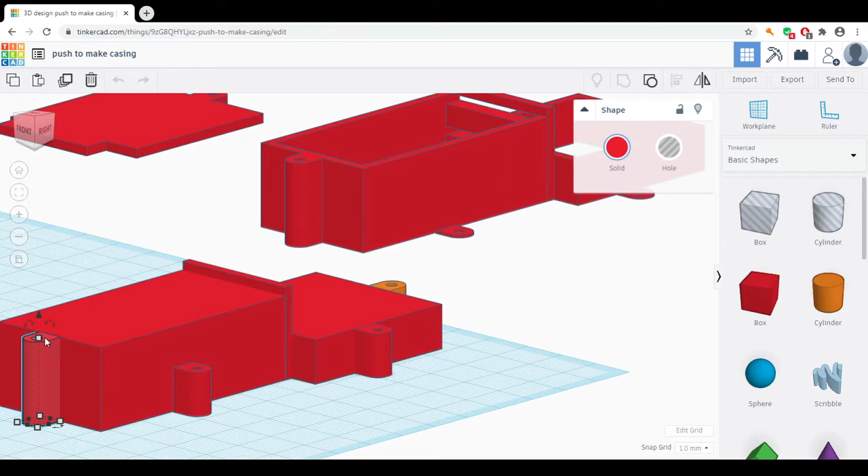So I'm going to make this 10, going to make the height of this 10. Okay, so it's all leveled out, looking good.

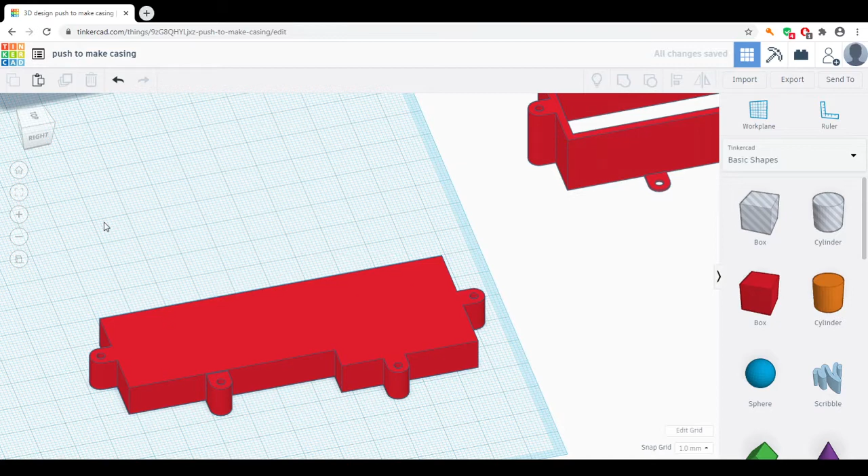Let's group everything again. And group it. Great, let's just check everything's been grouped. Oh, what's this? That doesn't look like it's 10, so let's ungroup again.

Click on that, what's that? No, it's 10. Does that look a little odd? Ah, that's not joined. Oh dear.

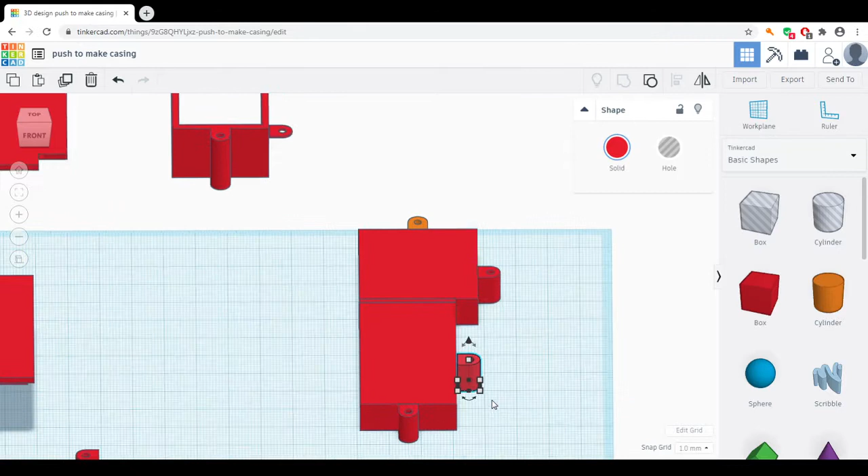Okay, so I'm just going to bring that in a tiny bit. Let's just look at it from top view and bring that in. Okay, great.

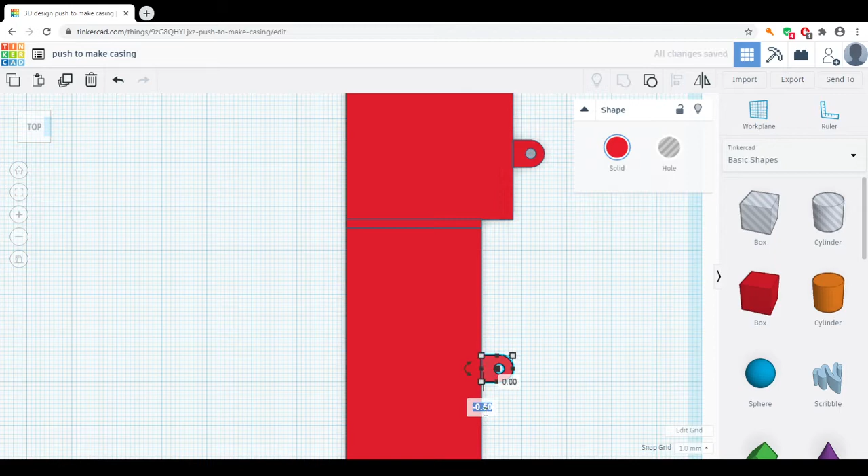Let's make that 0. That's great. It should be okay, it's not joined. Oh, that means I've just moved it in 0.5 millimeter.

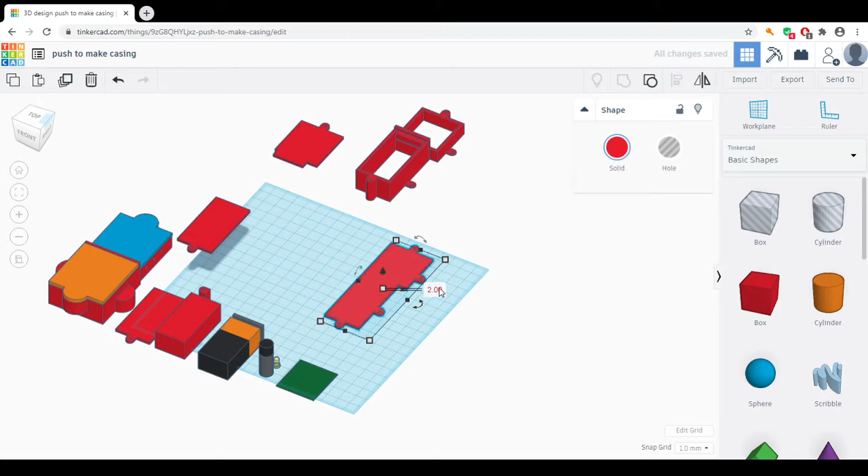Okay, group. Now that looks proper. Okay, I'm going to make this 2. Okay, and that now makes these screw holes at 2.5, because these are just at half a millimeter.

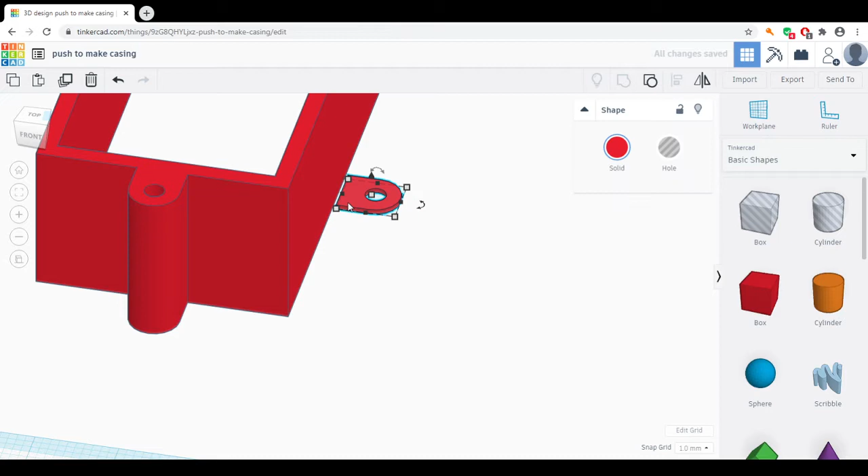I just need to ungroup this. This come across. I need to ungroup it again. That now looks as though it is ready. So let's just drag that in.

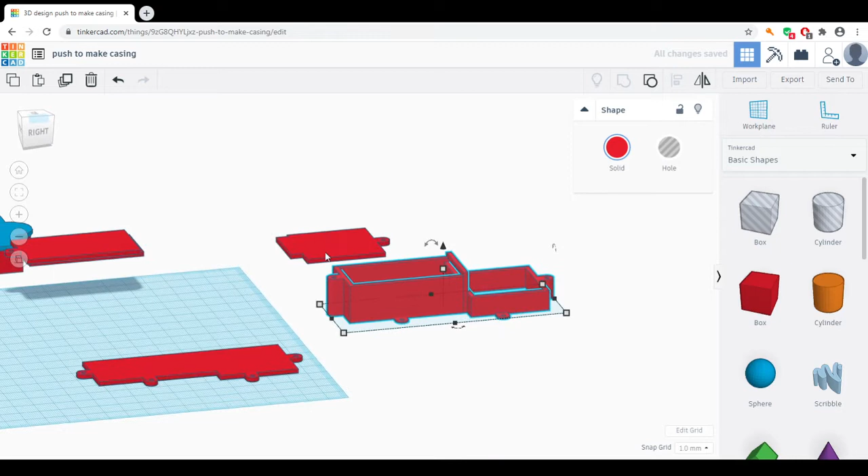Great, done. Now you've got to be very careful that you don't mess with the symmetry. I'm quite confident that that was okay. So that's ready, lids are ready. Base is ready. If you want to, you can place this on top and raise it up by 2.

But I'm not going to do that. I'm going to put the holes into this. Now I'm just going to do this very simply by placing 3 holes on this side and 1 hole on that side, because on the PCB that's what it looked like. I hope I've got the orientation of the PCB the right way around.

Each of these holes I want to make them 3 millimeters big.

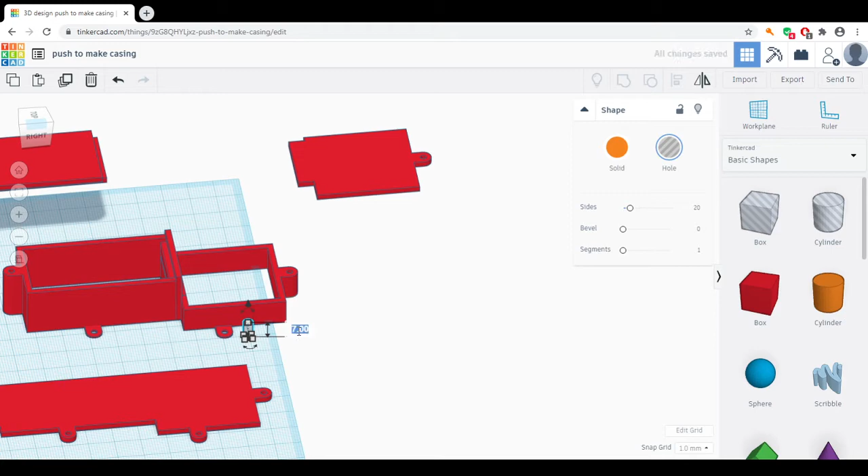Okay, brilliant. And I'm just going to make this... we can make this 2, or we can make this. Let's make it 2. And let's zoom right in.

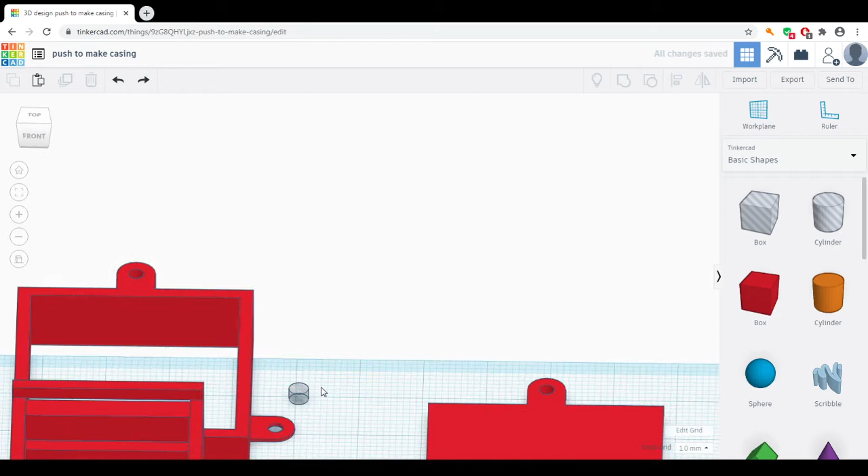All right, and let's rotate it. It's not rotating the right way. Excuse me. Sometimes it's better to make it taller, so... there we go, that's 90.

Oh, I won't do that. Make it taller because then basically it's easy to see what you're doing with the rotation of it.

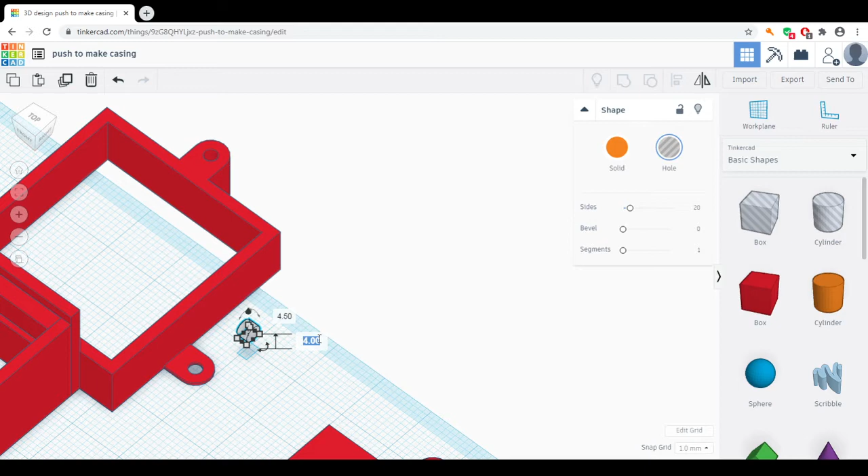Okay, great. So let's raise this up. From the base it's 3, and the sides I think were 10, so let's raise it up from the floor. I mean 4 is probably fine, and let's get that in place.

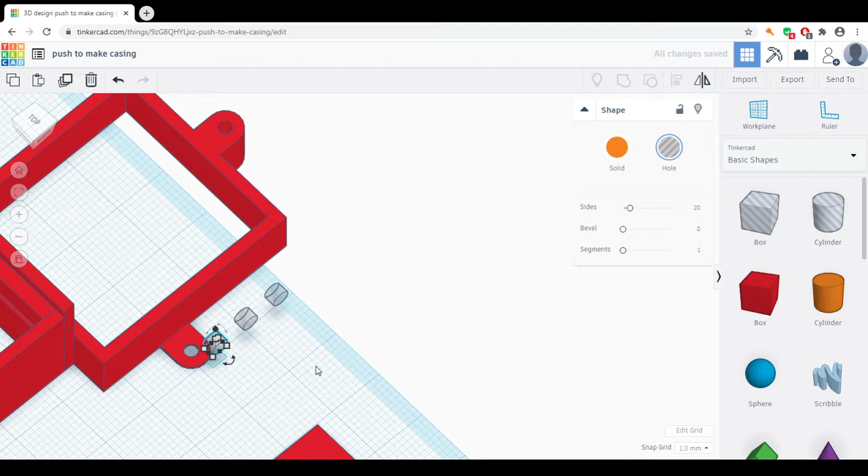So actually before that I want to copy that and bring it over 1, 2, 3, 4, 5, and do the same this way. Copy that, paste. 1, 2, 3, 4, 5. That looks pretty equal. I'm not going to be too picky.

I'm going to group these 3. Oh, before I do that I need 1 more, the other side. Push that back all the way. Okay, great, good.

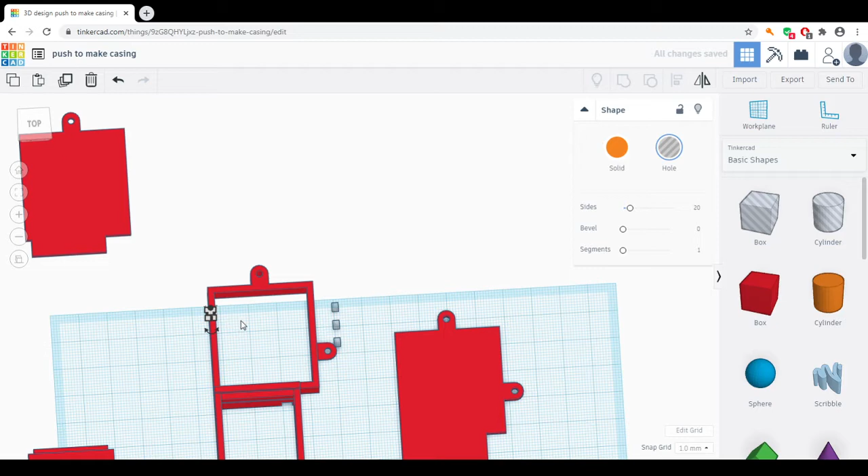I'm not going to be too much of a perfectionist with the placing of it. Just going to push it through.

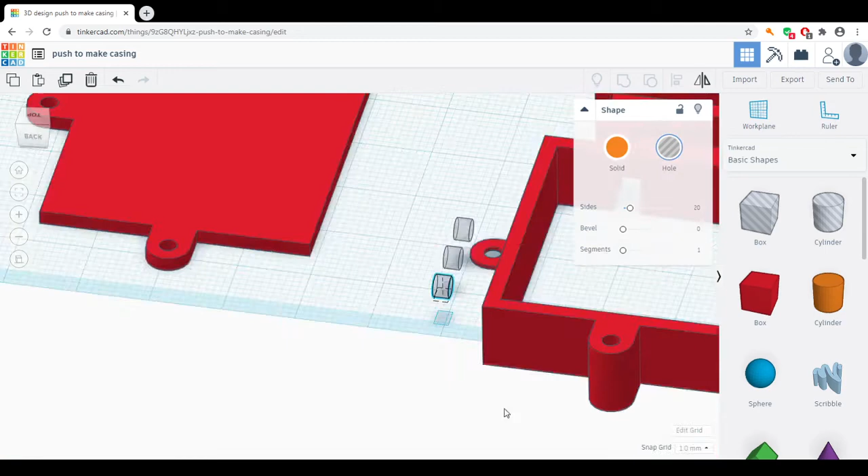And I think actually I will make these longer because I can't be bothered to worry about lining up the surface per se, like I had to do with the screw fixture. So I'm just going to make this a bit longer, make it 4, and that way I know they're definitely going to go through. 4.

Actually, if I just group these now, I'm happy with how they are, and I'm just going to collectively make them 4, and then I can just place these.

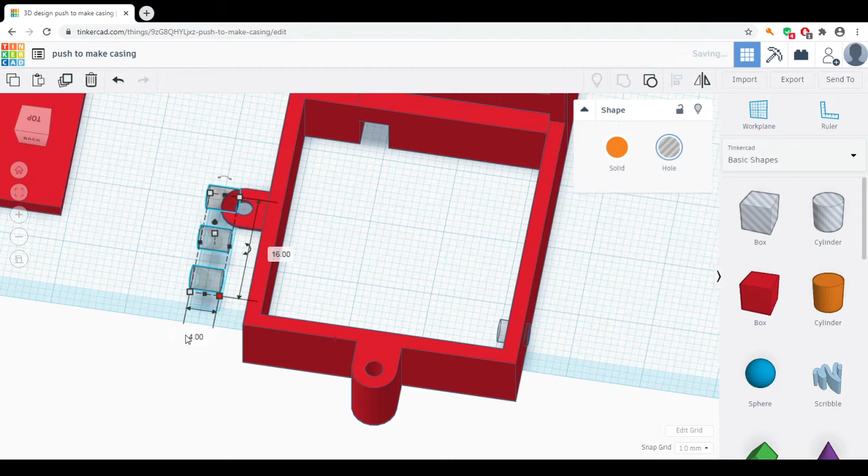There we go, that's fine. Happy with that, it's pretty centered anyway. I could center this actually a little bit more. Oops, undo.

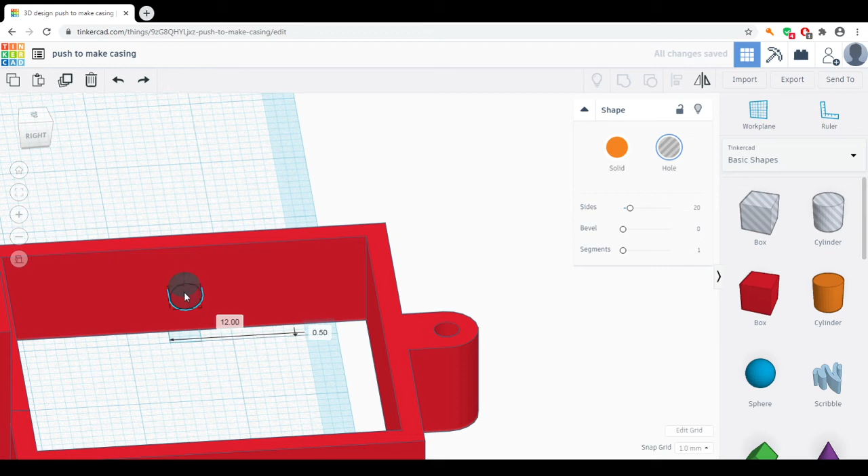Once again, they're quite small, so you have to make sure you're not touching anything. That looks pretty centered, I'm pretty happy with that. There we go, select everything, group it one last time.

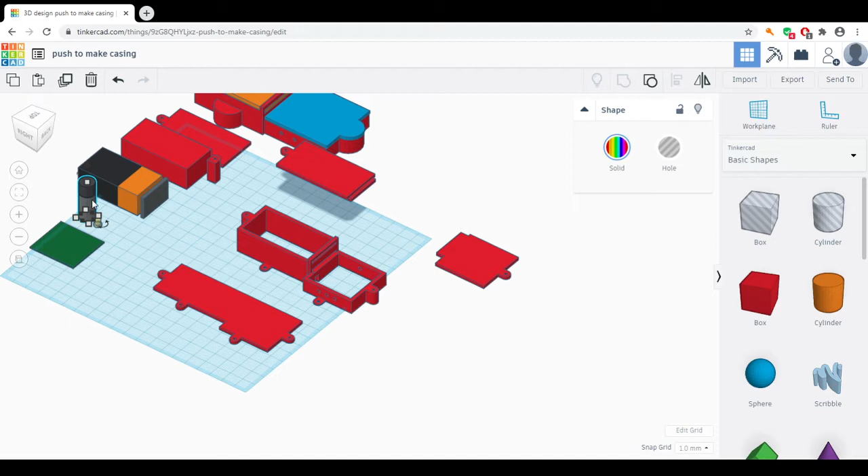Okay, and that's it pretty much. So you could also create casings, and I think it would be a good idea if we created a casing for the push to make switch as well, so that can actually be screwed in sideways. So I'll just very quickly do that.

The LEDs as well you could create little casings for. What I'm going to do very quickly is create a little sort of casing for that push to make switch, and then you can kind of screw it in place. Also, we could create little kind of cable tidies. So I'll just quickly do both of those.

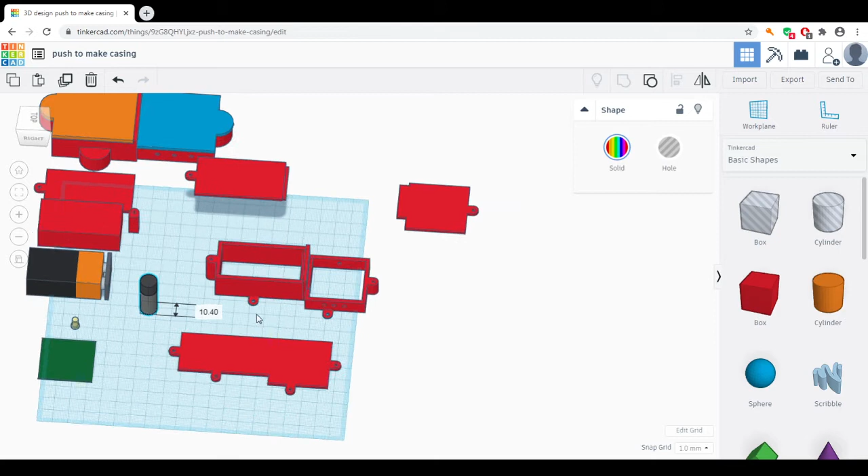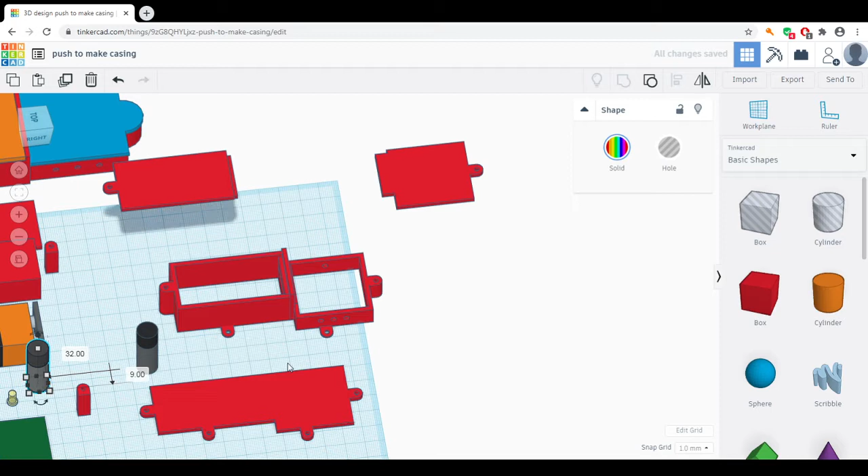I'm going to take this again, copy it, move it down. Okay, now this is 10.4, that's the sort of diameter. I'm going to copy that as well, paste it, and that's going to be, we'll turn that into a hole for use. Once you've got all your little component bank, it's great.

I'm just going to take this out of the way. Take this out of the way. Those are all our pieces. We want those flat on our bed because basically we can 3D print those as flat separate pieces.

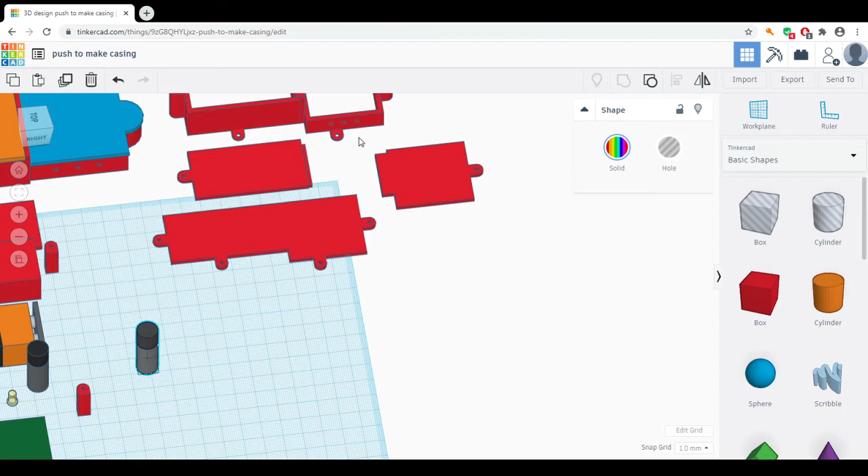The casing you can actually join together if you want. In fact, it's probably a good idea if we do that. I'm going to raise this up 2, and I'm just going to join the 2 together, and we'll just align them. Perfect. And we will take these things out of the way, and we'll join them.

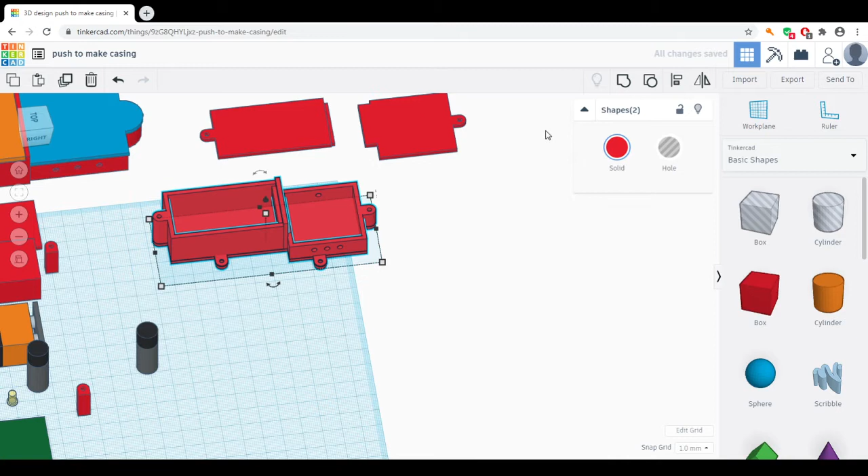Cool, that's our casing base. It'll be 3D printed from the base upwards, so that's absolutely fine.

Right, so back to business on this. I'm going to just make this into a hole shape. And what I want to do is have a casing for this. Actually, I don't want to make this a hole shape, I want to make it solid.

Copy that, paste it, and that's what I want to make my hole. This I'm just going to make bigger by 2, so for the sake of making everything easy, I'm going to make it 12 by 12. And I'm going to make the height of this 20.

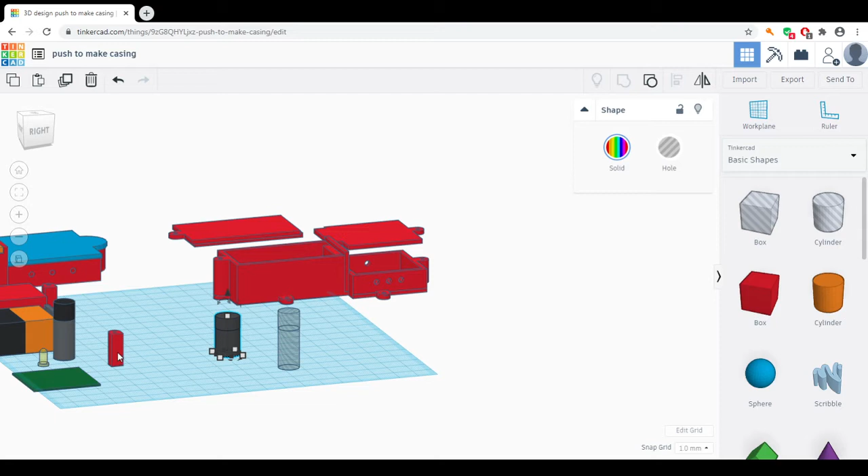And I am going to add on the sort of screw fittings or fixtures so that this can be sort of vertical. So the way I'm going to do that is by rotating everything around to the screw fixtures instead of the other way around, and then I'll rotate everything back once it's like an assembly.

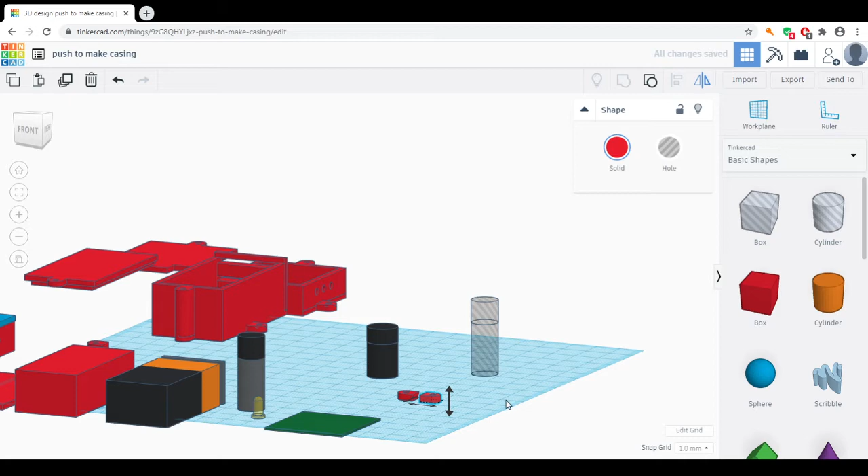So I'm going to make the height of these 2.5, and I'm going to copy that, paste it, and mirror it this way. Great, so you can kind of start to see what I'm going to be doing with these.

Unaligned it, just pan over here. My very busy work plane starting to look like this. And I'm going to just line these up, and I'm going to rotate this. Let's see, 90 degrees.

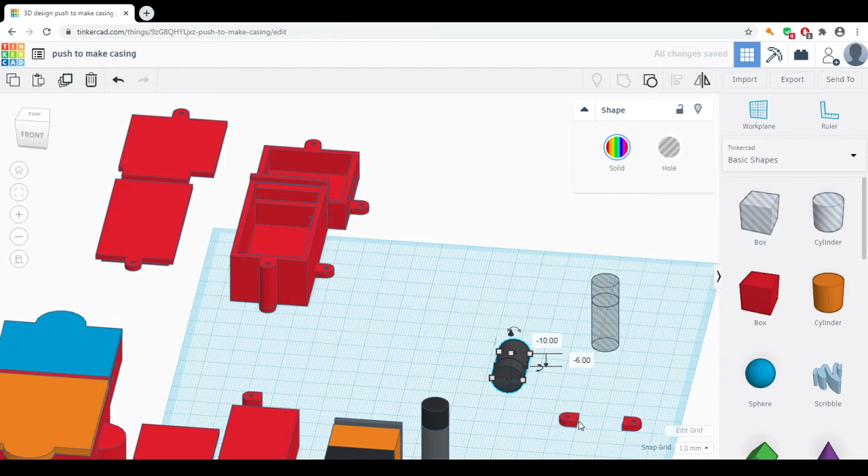Okay, now we know that this is a diameter of 12, so what I'm going to do is use this hat and bring it down into the ground by -6. And that should have everything centered. Okay, great, so that's actually below the work plane.

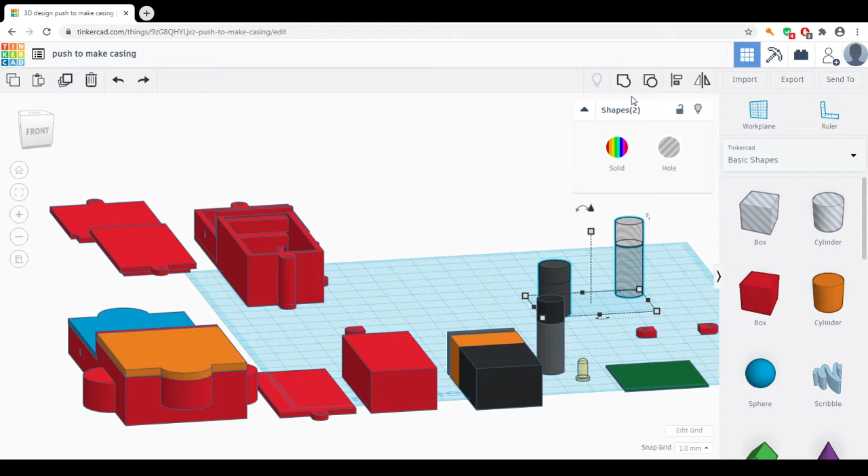Probably actually before I should do that, I should place this inside of this and make a hole. It's a little misstep that I forgot about. Good, right, you probably spotted that.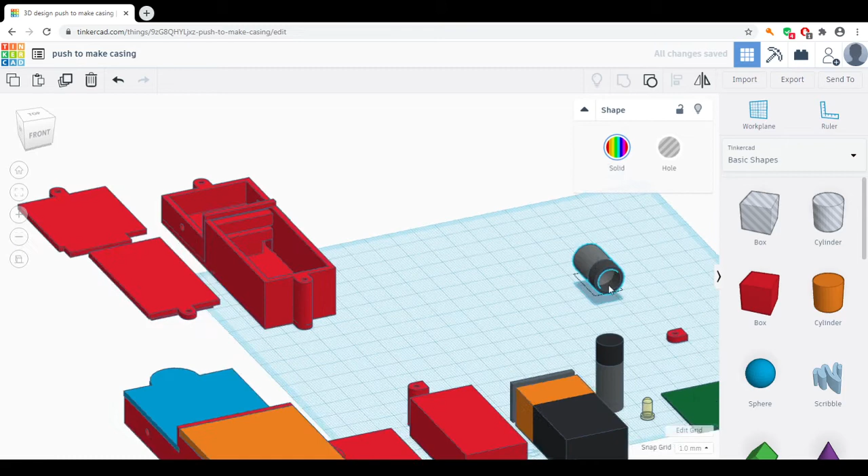Great, so that's my case basically for my push to make switch. I can do the same for the LEDs if I want to, and I could create little kind of cable tidies this way as well, which is really cool.

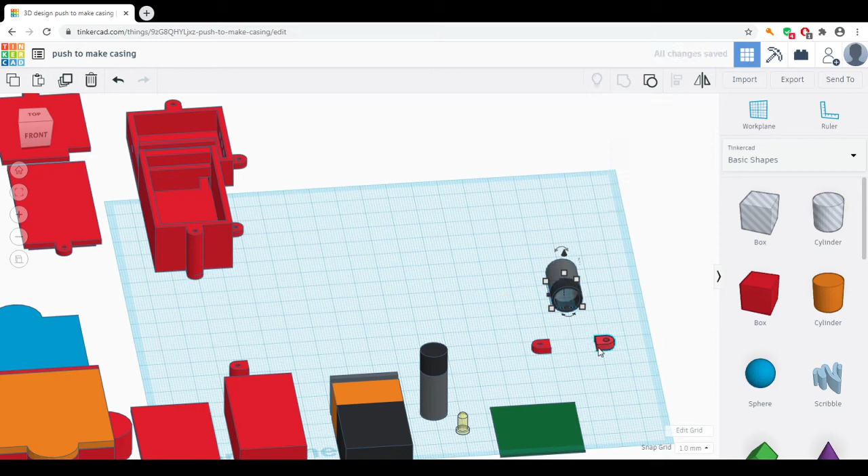So that's dropping that in 6. I could actually raise up the other things 6 as well if I wanted to, but I'm going to do it this way because there's one component there and there's 2 components there. So the gap here I want to have, I'm going to actually get these together, then take them apart, and have a gap of 6. So 12 - 1, 2, 3, 4, 5, 6, 7, 8, 9, 10, 11, 12.

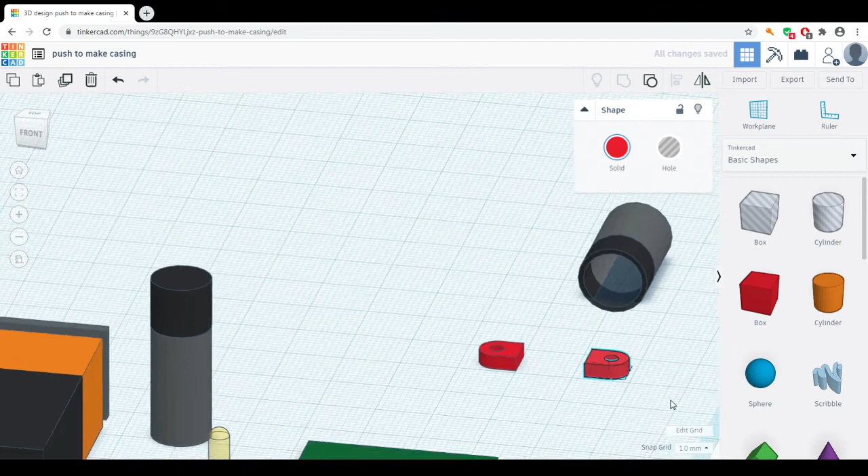Now this should slot perfectly between the two. Okay, let's just do a little bit of alignment. So I'm going to use this here, pan over to it. Great, okay, so let's use a bit of alignment.

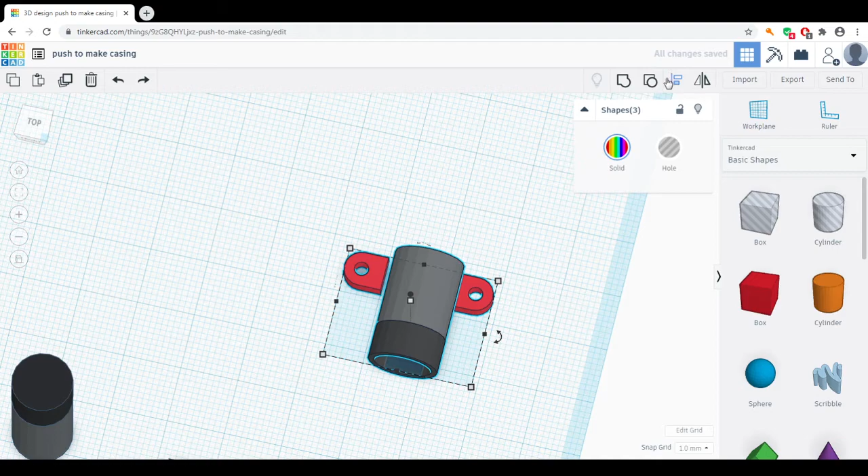Center everything - no, don't want to do that. Do that. Align. Do that, yeah, great.

I think what I'm going to do with these two first is just group them, so they're kind of glued in a way. That way I should be able to align them a little bit better.

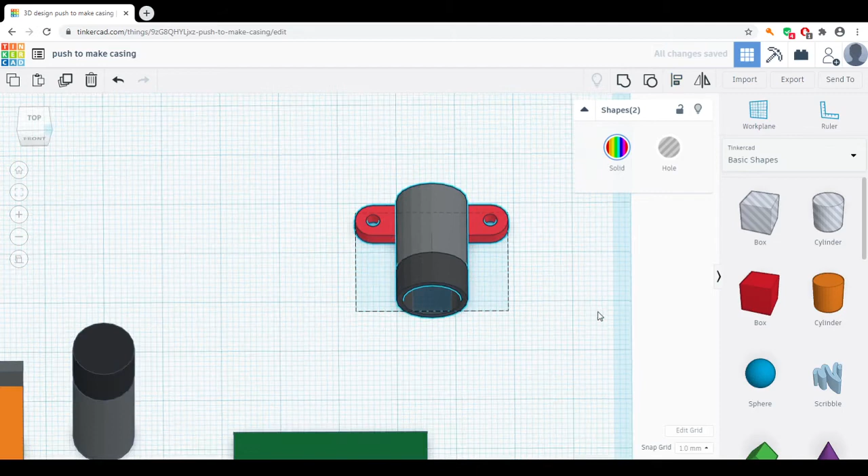Like that, yes. Now you might notice that this is kind of sitting there like that. Oh, this is actually raised up a bit as well, hasn't it? I'm going to raise this up, I just wanted to have that all aligned. So I'm going to raise this actually up to, oh it's actually, yeah, bring it up to 0 actually.

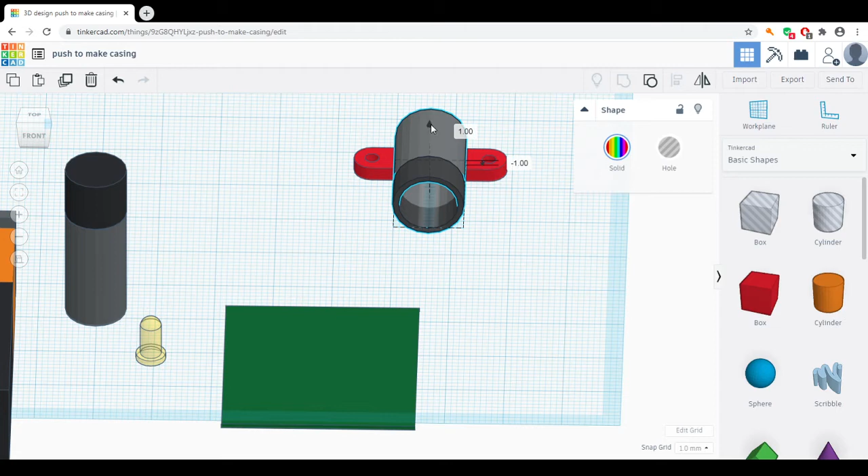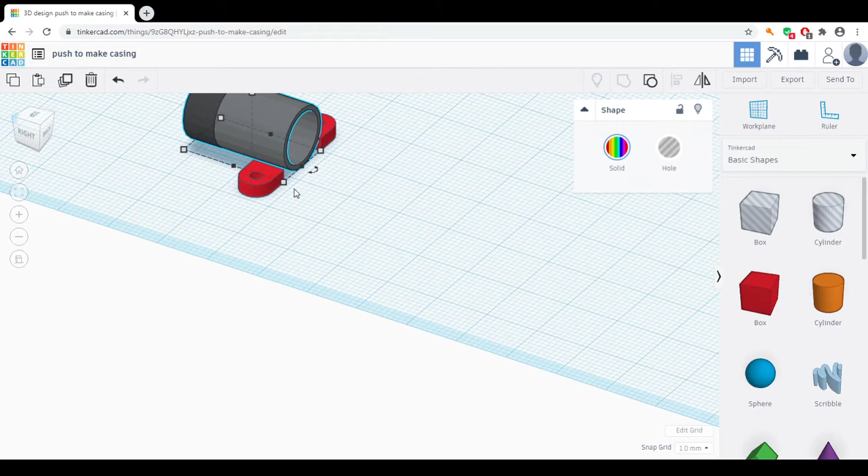I didn't need to, I wanted to have it sort of sunk into the plane just so that I could think about maybe having these centered along the side of it, but actually looking at this I need to have this actually sitting flush on the side of the cable tidy. So I should have actually had this casing just sitting on the actual work plane, zeroed to the plane, not sunk through the plane.

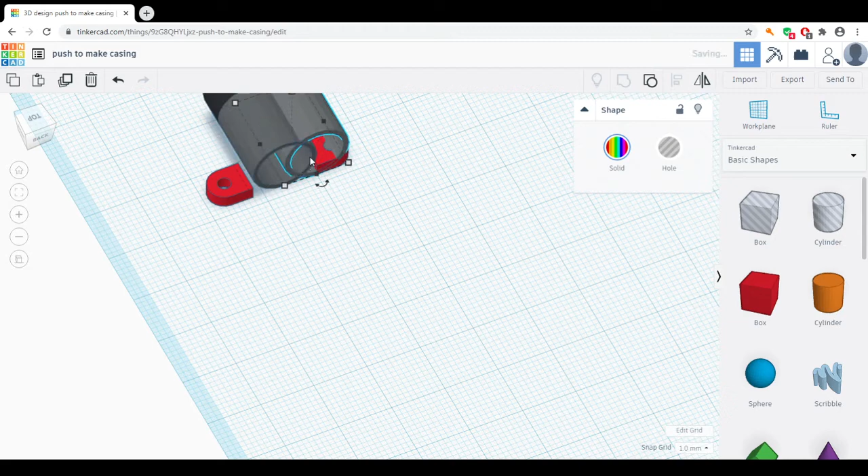Right, okay, so I'm going to take this, I can copy this, paste it, place that over this again, and I'm just going to move it back a bit. I'm just going to bring this back so that it's there, because one of the things I'd like to do on this is just put a base on it.

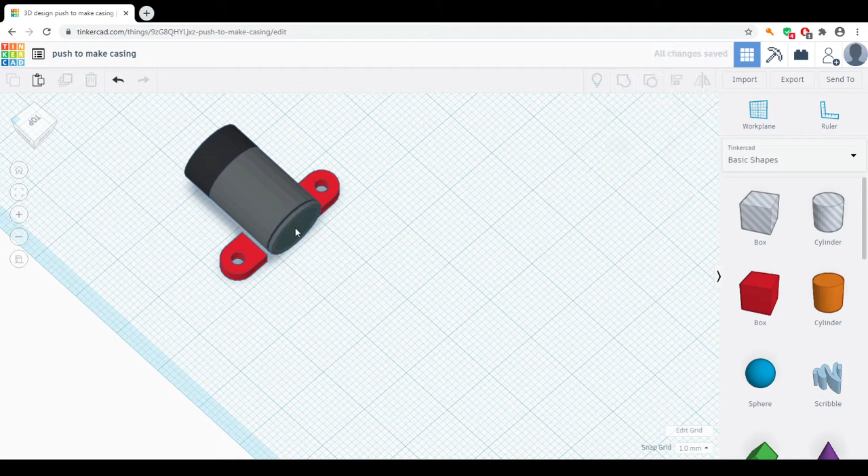This I'm going to ungroup and get rid of this hole, and that should now give me a nice solid base. So check that.

What's this? Oh, I see, it's just remained in 2 colours, that's fine. It's kind of done that proportionally, I don't really mind about that.

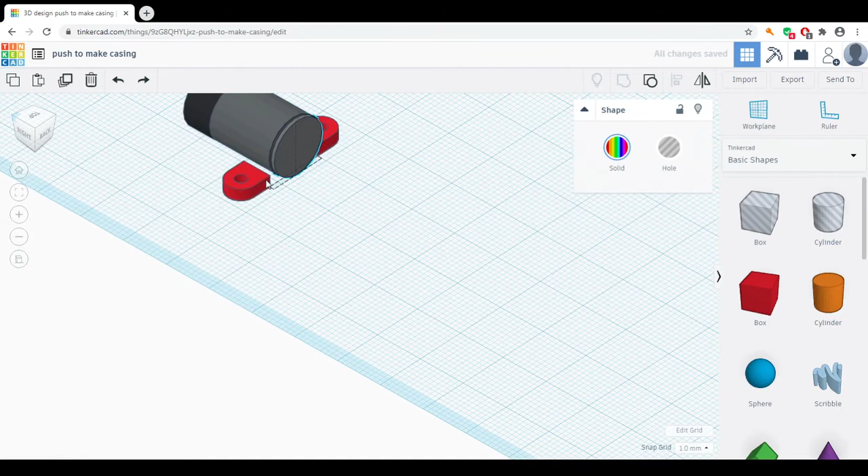Okay, I'm going to ungroup these, and I'm going to ungroup these again, and you're going to see why. I've got this square bit, which I can now just pull across through the entire shape without selecting everything, of course, obviously first.

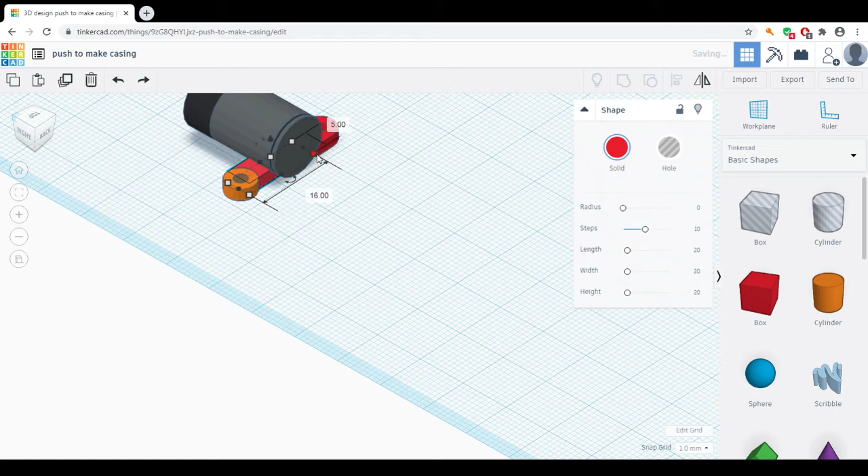And that just touches the other shape. Oh, not quite. Let's do it one more time. Now it does, yeah, perfect.

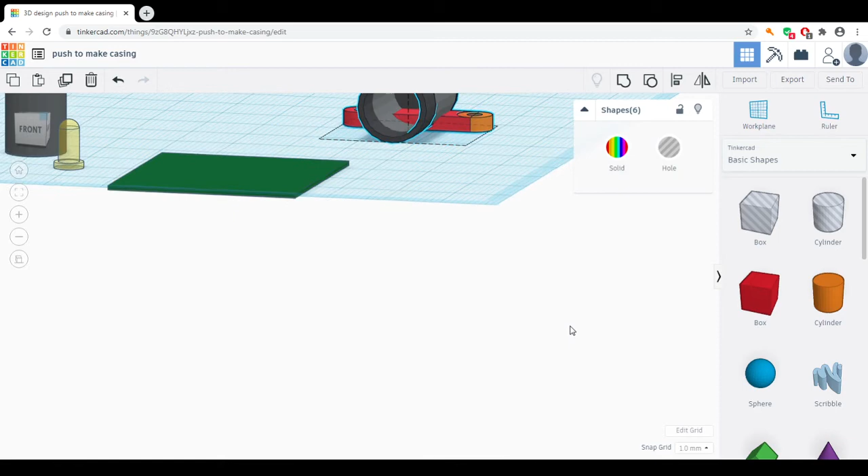I'm going to ungroup absolutely everything again, because the problem with this at the moment is if you look inside of this, you'll see that that's actually gone through and it's interrupting our casing.

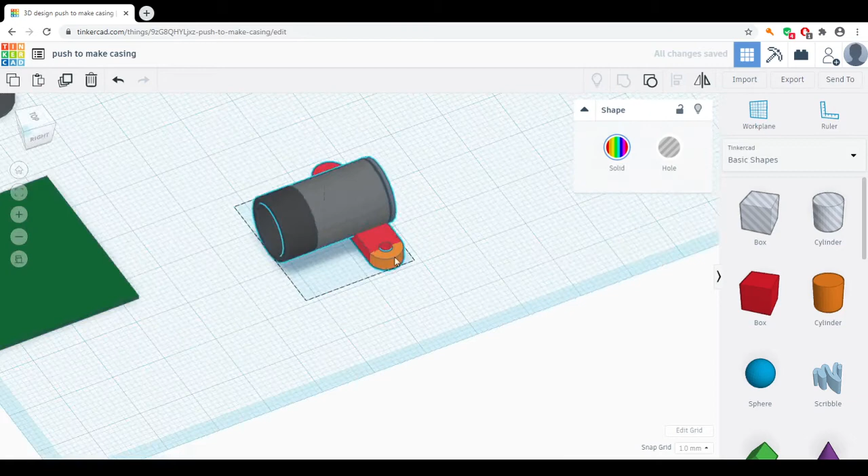So I'm going to ungroup this. So you should see, yes, and then I'm going to once again regroup everything, and that should hopefully cut through. Yes, very nice. And that, if you want to print it this way, you can do.

If we rotate this back up 90 degrees, we'll have to raise it up because it's sunk through the floor, so to speak. Bring that up to 0. That is the casing that we can screw to the side of our, and I'll just group everything.

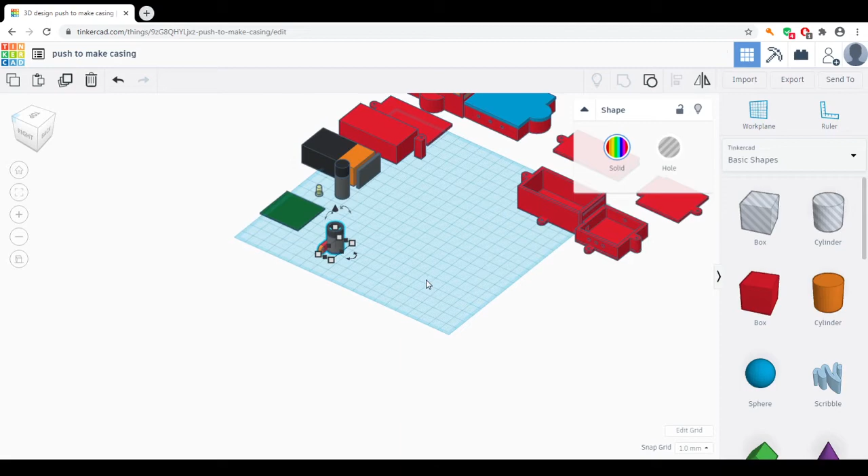That is the casing that you can, I need to regroup everything, excuse me. The reason why I got a little confused is the colour is multicolor. I'm just going to make it one colour, which is red. That's now the casing for our push to make switch.

You can use a little bit of epoxy resin in there if you want to. Same thing with the PCB inside of the casing, like a little drop of, or even some double-sided foam, sort of sticky tape.

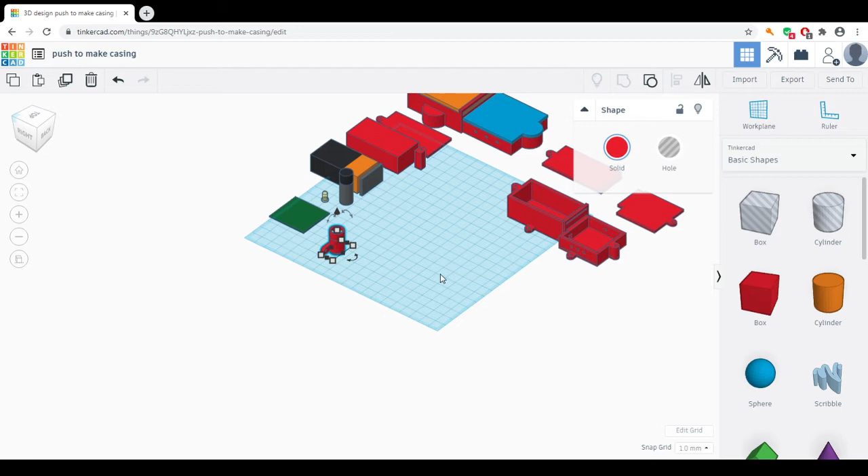I am going to say that we could use this again. We could recycle this for the LEDs, in theory, or we could also recycle this. I'm going to copy and paste it.

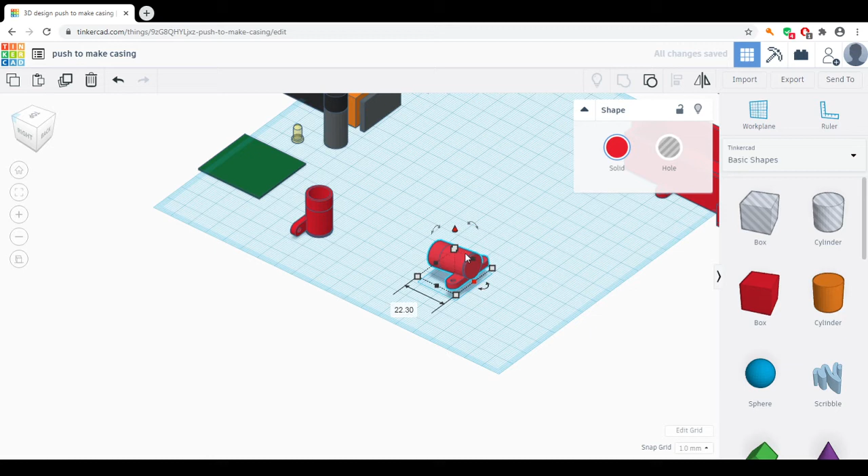For like maybe making little tidies, cable tidies for the cables of the LEDs, because you don't want to have cables everywhere. Even though we'll have the cables sleeved, you don't want to have them everywhere inside of your cable tidy, because that's just a little bit dangerous.

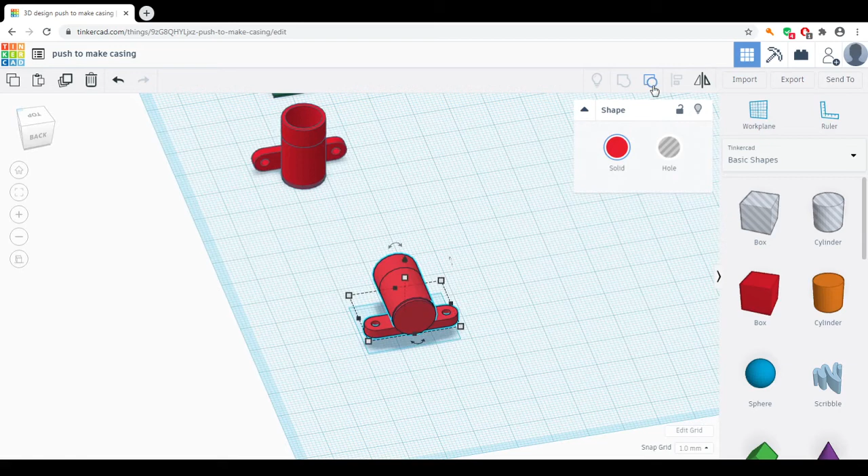So a good way of having them is to maybe just have, we ungroup everything here again, having them sort of tidied away. So what I'm going to do very quickly is just recycle this component by ungrouping it. And I'm going to keep most of this, but I'm going to make it a bit smaller so it's less obtrusive. Let's ungroup that again.

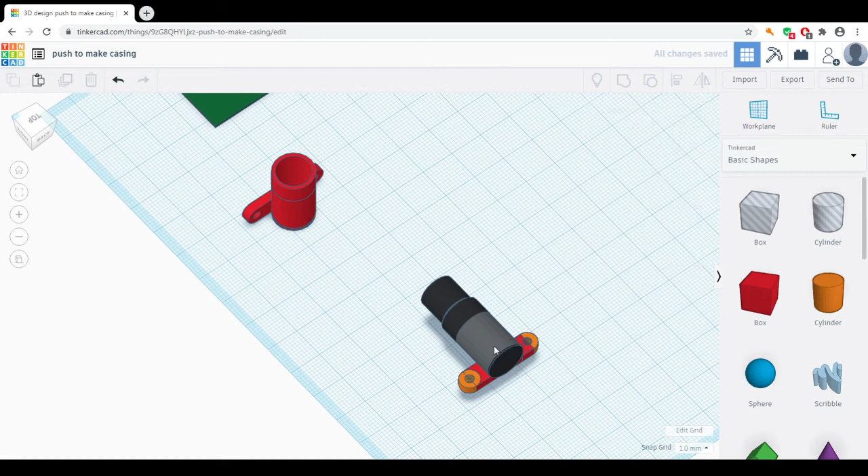Good, alright, is this back now? I'll just delete this now. Oh, do I have to delete that bit as well? Yeah, it looks like it.

Right, I'm going to make this smaller. So let's see, I'm going to make this, that was 12, it's kind of diminished a little bit somehow. Doesn't really matter so long as the diameter inside has stayed the same, 10.3.

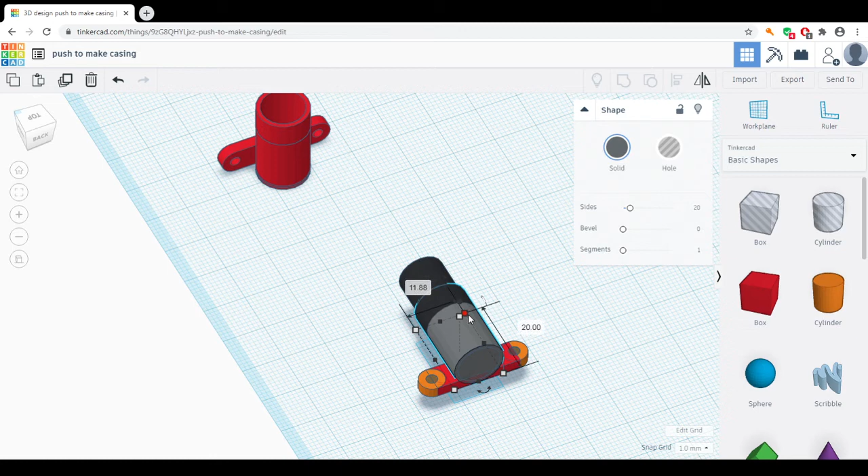Hope it has. Yes, it has. That's all that matters. I'm going to make this, first of all I'm going to make this 6. Okay, so it sits back. That's actually come apart, I see, that's fine. So it actually sits back perfectly on here.

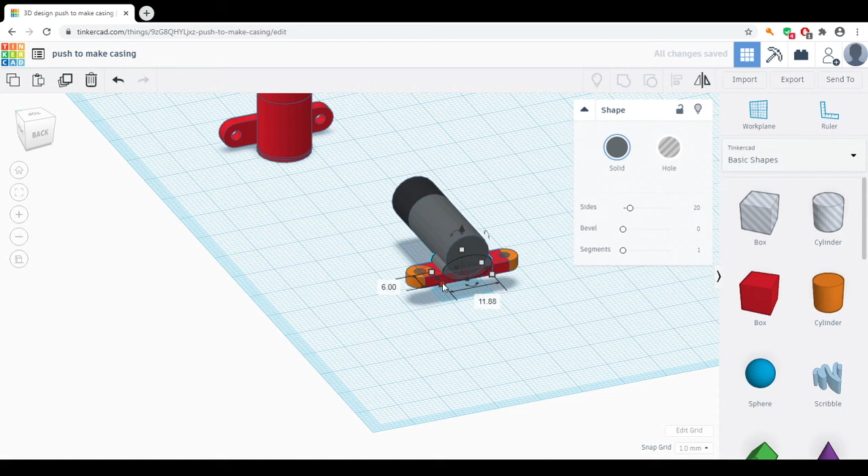I'm going to give this, I'm going to make this sort of cylinder shape. I'm going to make this 6, and I'm going to make the sides 6. Just zoomed in there, it's pretty cool.

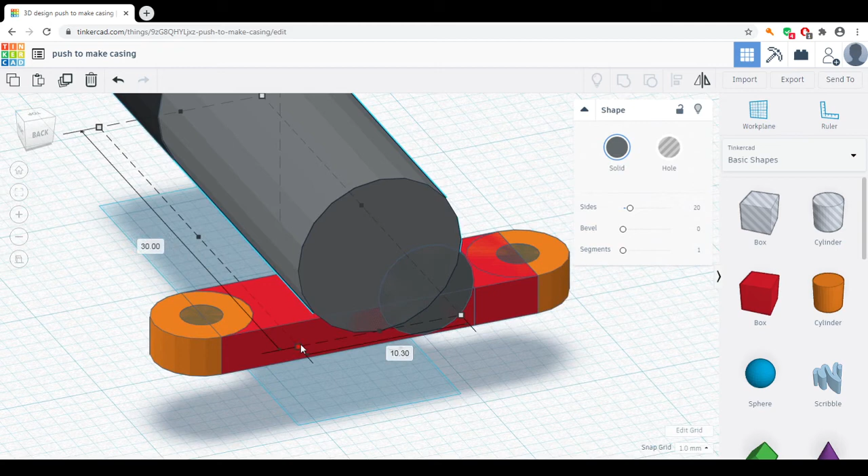I'm going to make, so that's the hole. I want to kind of keep that centered if I can. So let's make this as well. Let's go to this. I want to make this 6. I'm going to make this 6.

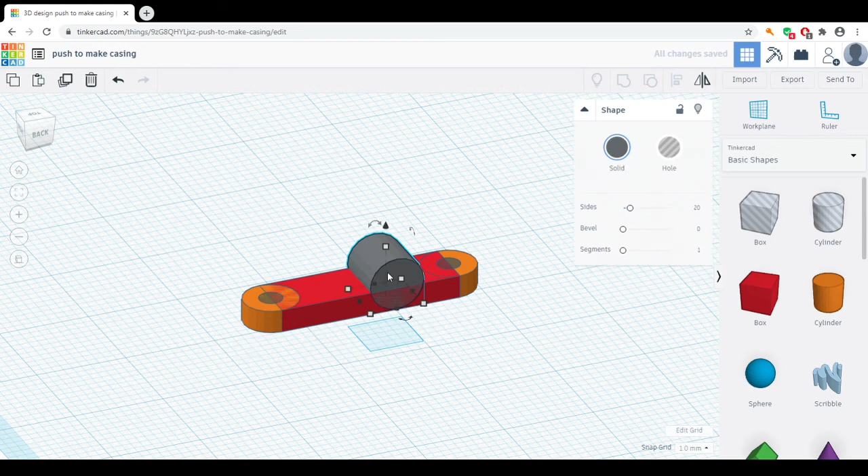Okay, and one of those, let's get rid of that. Undo. I can get rid of this now. It's all kind of coming apart because when I originally made the casing, the push to make switch...

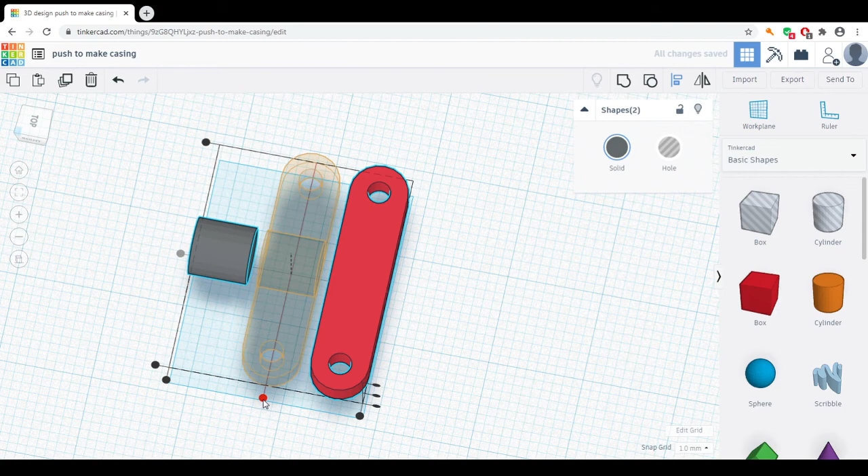I made it in different parts to kind of just make it look realistic. I'm going to group this again. And then I'm going to center everything using the alignment. Very good, and I'm happy with that.

Now I'm going to make this. I'm going to copy this, paste it. Let's undo that, still on the line. Copy, paste. I'm going to make this 8 by 8.

I'll make that 6, keep the length the same. I need to make the height sort of 8. Good, right, excellent. I'm going to move this over.

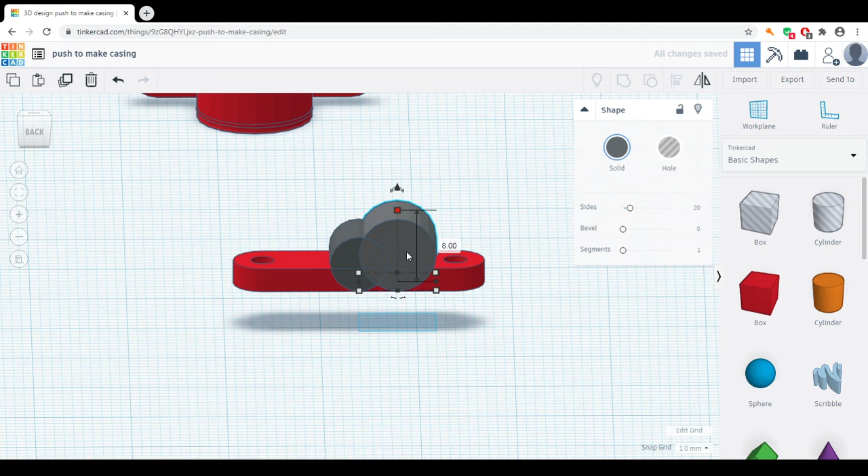So this and this I want to be aligned. That's already aligned perfectly. I'm going to just temporarily group this. Oh no, I can just move this over. This is fine if I just move it over using the buttons. There we go, that's perfectly aligned.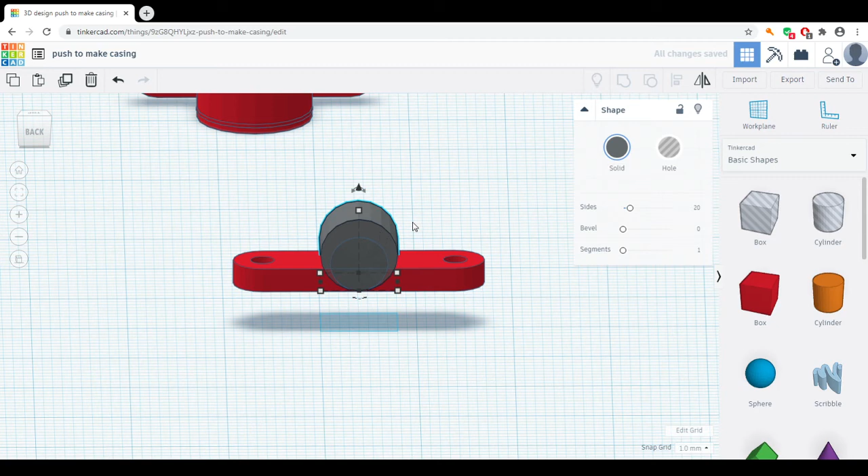I'm going to take this and this. Can you take both? It's a bit tricky. I'm going to move that back for one second. There we go, makes it a bit easier.

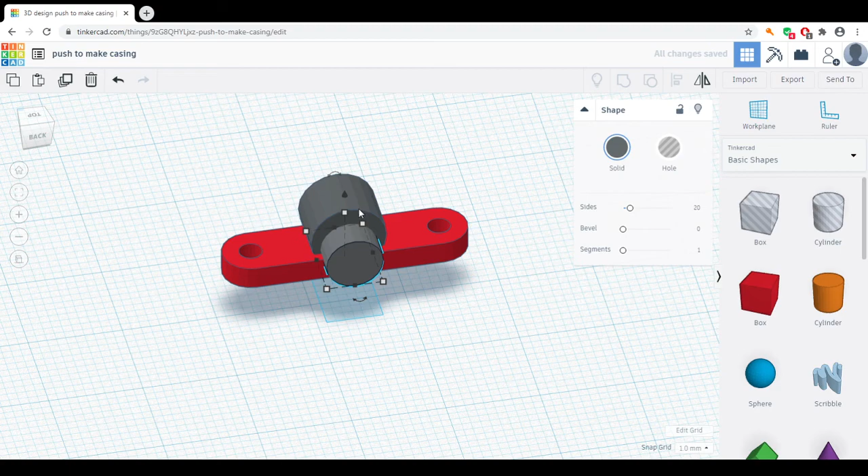This is going to be a hole, so I'm going to make this actually longer. I'll make it 10. Yeah, I'm going to move that back through the other side. And I'm going to align these two together, like so. So that hole is actually off the ground.

And I am going to bring this back to this. I'm going to deselect everything, and just this, and just the case. Oh, did that move? Yes, it did. Just the case.

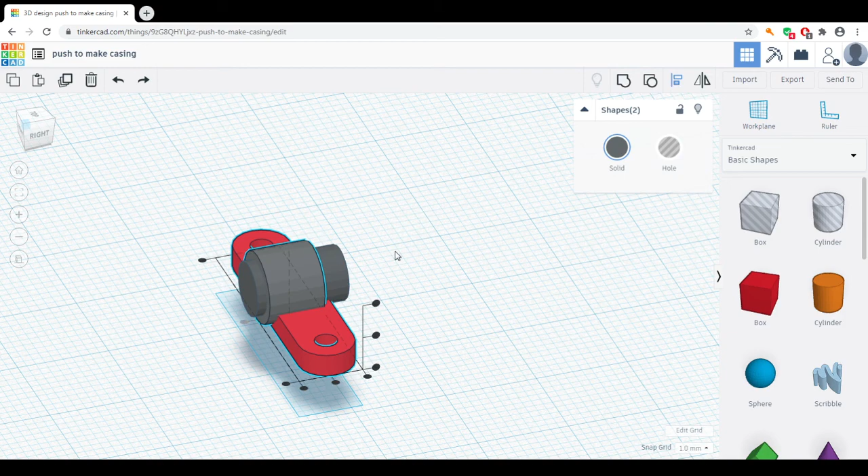This thing here, and this. And I'm going to align those, center them. Happy with that. Group the hole. Before I group it, I need to make that a hole. Make the hole thing and group it.

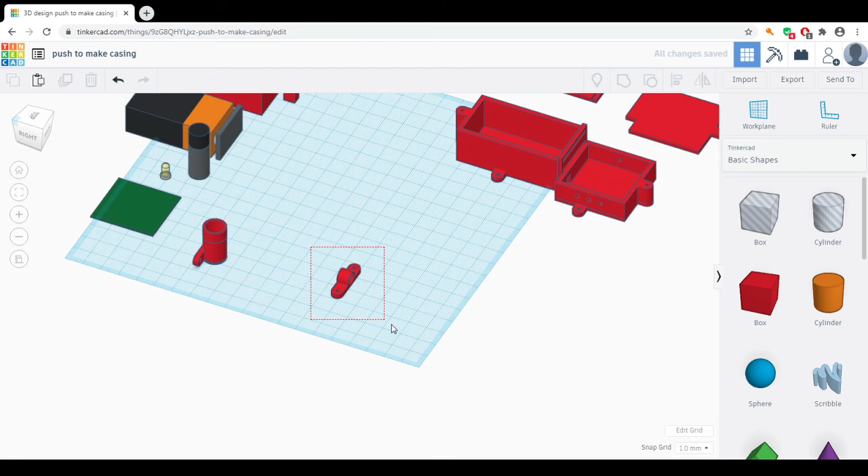There we go, perfect. So we've got a nice little cable tidy there as well. It's floating off the ground, so I'll take that back down to 0. And you can just copy those. You could make like 5 or 6 of those, and they're done.

Okay, that's it. Very, very long tutorial there. I'm going to sort of divide these up and load them up separately.

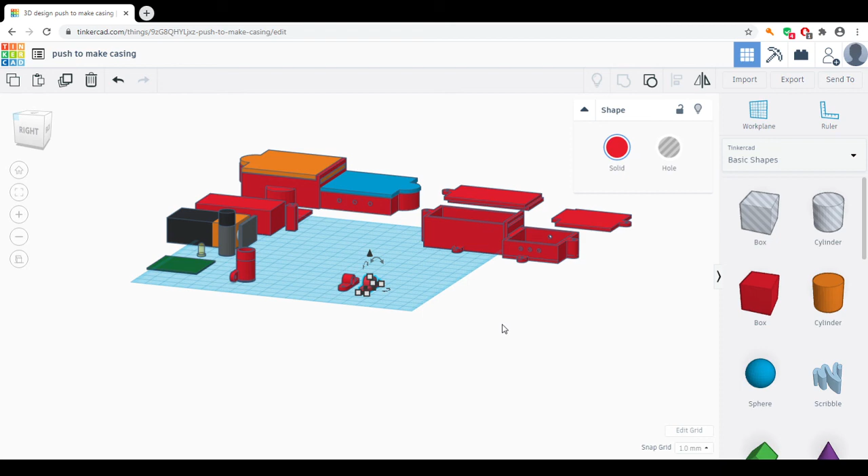Okay, see you soon, hope you're all well, and I hope that this was helpful for you. I think that this is a really good way of learning how to use Tinkercad. I certainly learned a couple of things myself along the way.

Fusion 360, obviously that's something that you could also do this on, although some of the things are slightly different. Quite a few of the things are quite similar. I've just used this because of ease of access for everybody.